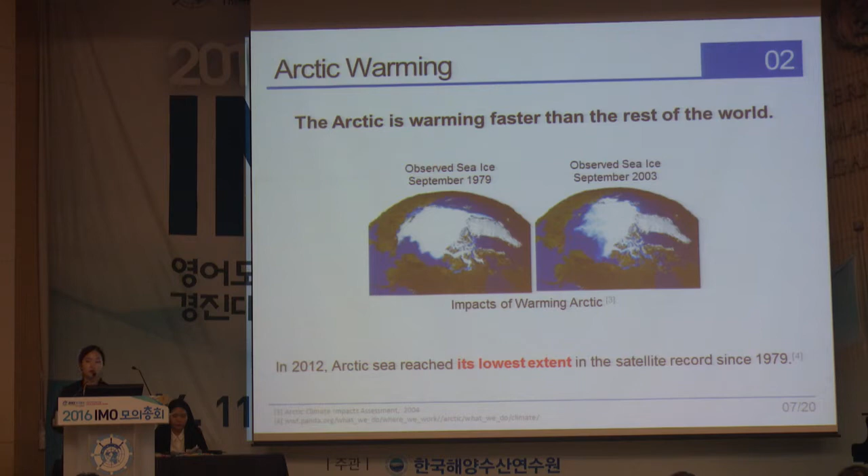Also, 80 years from now, the sea level is expected to rise more than 1 meter. And air temperature already increased about 5 degrees Celsius over the last 100 years. Moreover, the Arctic summer sea ice is expected to disappear completely in 2080. That's why we need to regulate the black carbon to stop the Arctic warming.

And where does black carbon come from in the Arctic? One of the primary sources of black carbon emissions is shipping. According to my research, they predicted the emission of black carbon from shipping potentially accounts for about 50% of the whole BC emissions in the Arctic. As you know, HFO is a main fuel of vessels. When HFO burns to activate the engine, it generates a lot of black carbon. Therefore, shipping vessels shall be under regulation by IMO.

However, despite the necessity to regulate emission of black carbon, in MARPOL, regulations are insufficient. And even in the Polar Code for vessels operating in polar waters, there is no regulation of black carbon. It is just encouraged not to use or carry HFO in the Arctic. For these reasons, the next presenter will consider how to reduce the emission of black carbon.

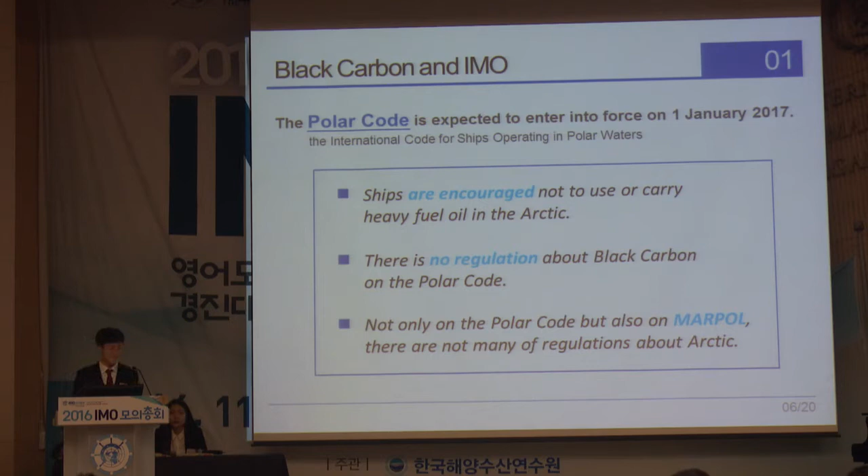Next subject we have to talk about is, obviously, fuel itself, which generates black carbon. Currently, most of the vessels operating in the oceans use HFO, heavy fuel oil. The reason why they use this is very simple. It's cheaper. But this HFO causes an extraordinarily large amount of black carbon emissions, and it is used almost exclusively in the shipping industry. Why is that? The reason is also very simple. Restrictions on HFO are not strict.

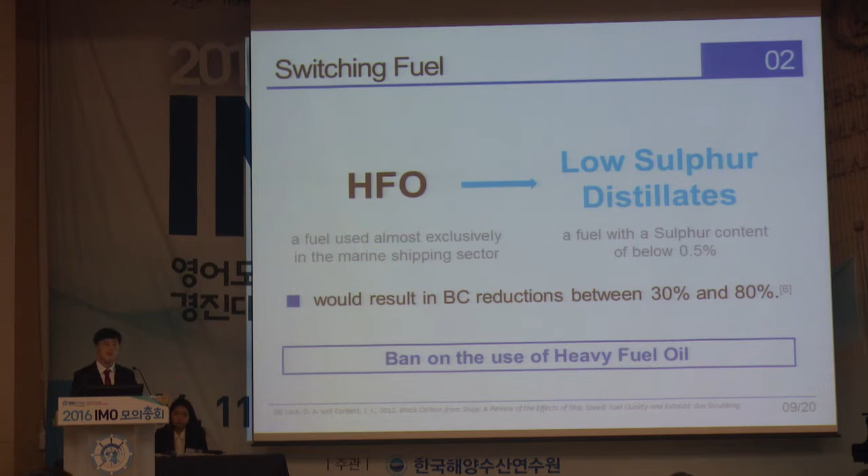Now, you might think that the use of HFO is the only cause of black carbon emission. It is not. There's also another factor called slow steaming. Slow steaming means intentionally reducing engine loads, which leads to a reduction from full speed to lower speed. Shipping companies around the world have pursued this method in order to make fuel savings so that they can save their money.

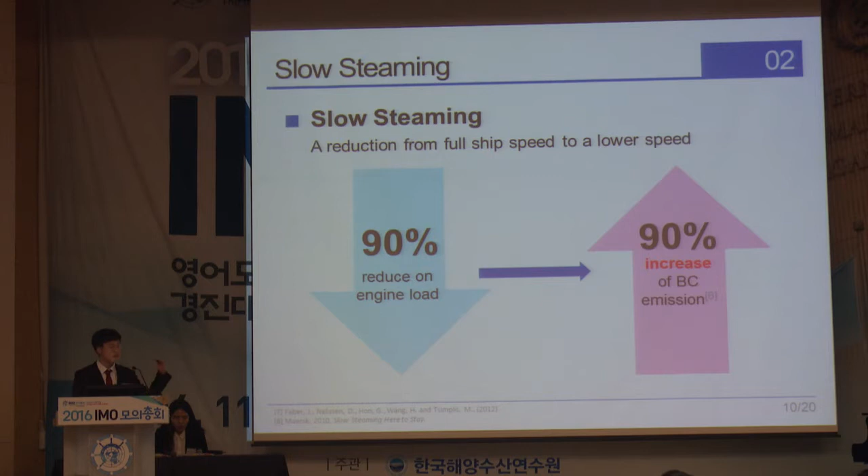According to multiple scientists in a report by Maersk, a 10% decrease in speed of a vessel leads to a 20% reduction of fuel consumption. On the other hand, if engine load is reduced 90%, it leads to a 90% increase in black carbon emissions. Let's look at a more simple graph about this phenomenon.

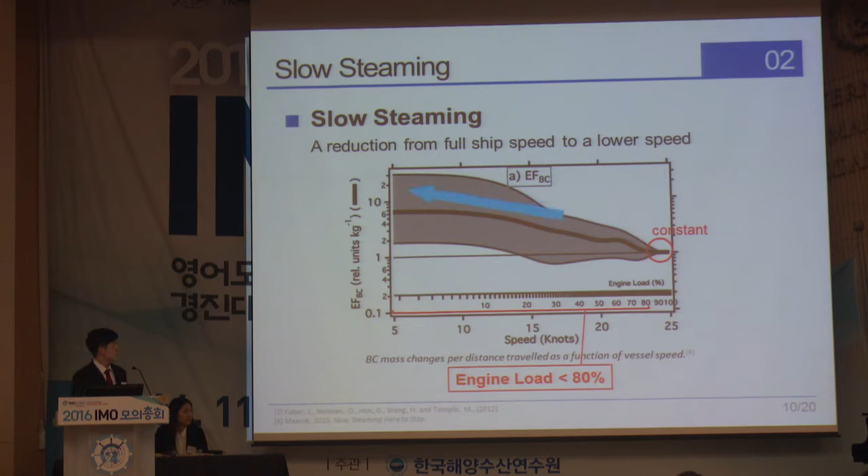When engine load remains almost constant, like from 80 to 100% of its full capacity, black carbon emissions stay almost constant. However, if engine load decreases below 80% of its full capacity, you can see there's a rapid increase in black carbon emissions.

In that sense, there should be proper adjustments on using slow steaming. And those are derating and retuning. Both are basically the same, so I'll just say derating. Derating means operating an engine at less than its rated maximum capability in order to prolong its life expectancy. This method provides ideal combustion at all loads so that it can counteract the significant increase in black carbon emissions caused by slow steaming.

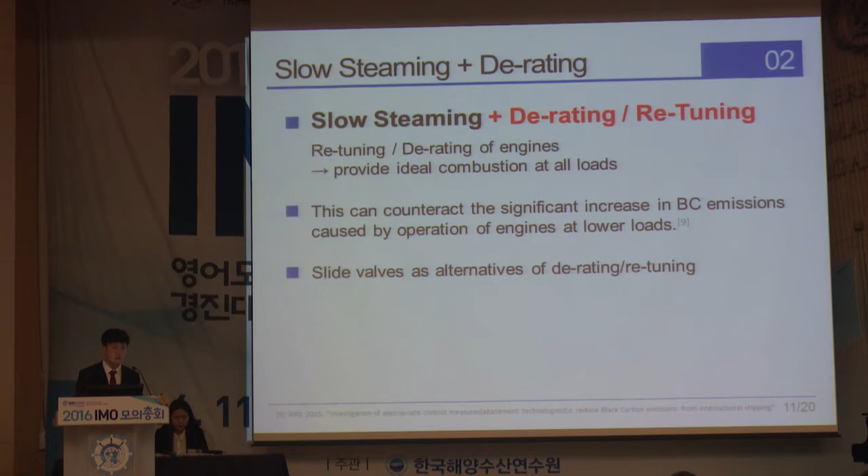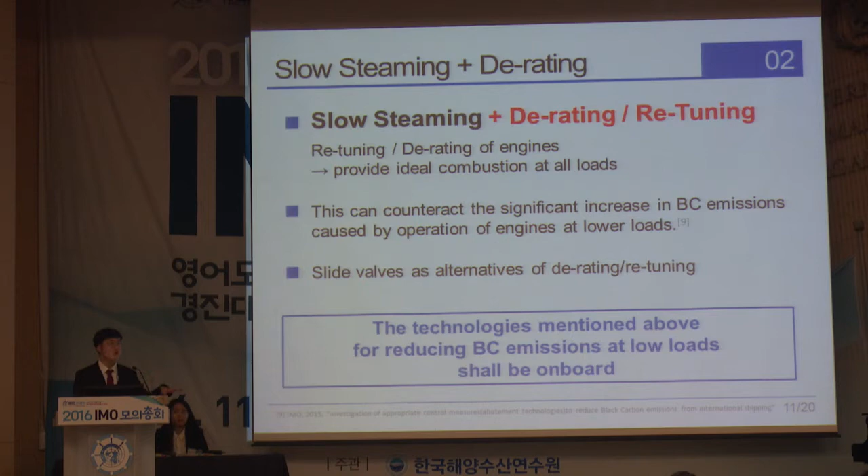In case of a vessel for which it is impossible to use derating, an alternative device called slide valves can be an option. Slide valves are easy to install and operate, and of course reduce a lot of black carbon emissions. Therefore, we suggest to the IMO that the technologies mentioned above for reducing black carbon emissions at low engine loads shall be on board.

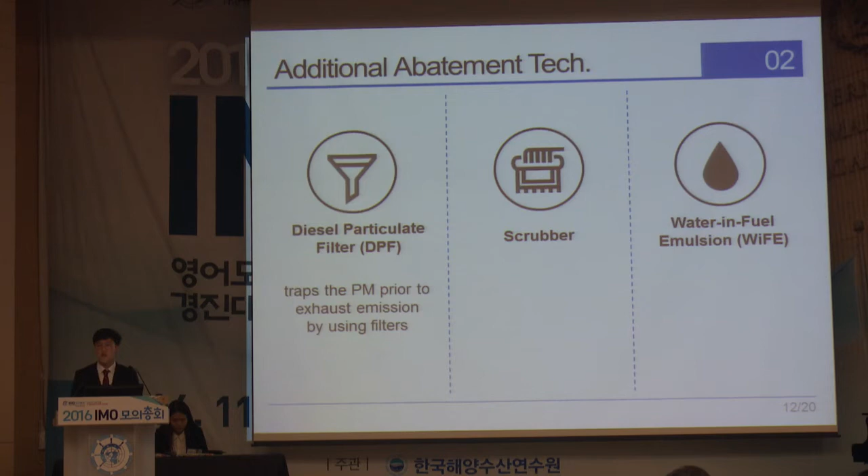However, switching fuel or using derating is not enough. Low sulfur distillates are definitely cleaner, but they are just fossil fuel and still make some black carbon emission. According to the IMO report on black carbon control measures, 3 possible black carbon abatement technologies are considered the most cost-effective and feasible. The first one is the diesel particulate filter, DPF. Although DPF is a rather new technology in the marine sector, it has been proven quite effective on reduction of particulate matter and black carbon as well.

Second is the scrubber. A scrubber is a device that uses seawater or fresh water to wipe out all the pollutants coming out from an engine. Third, water in fuel emulsion, WIFE. WIFE is a technology adding water continuously to the fuel supply process, which luckily leads to a reduction of black carbon emission.

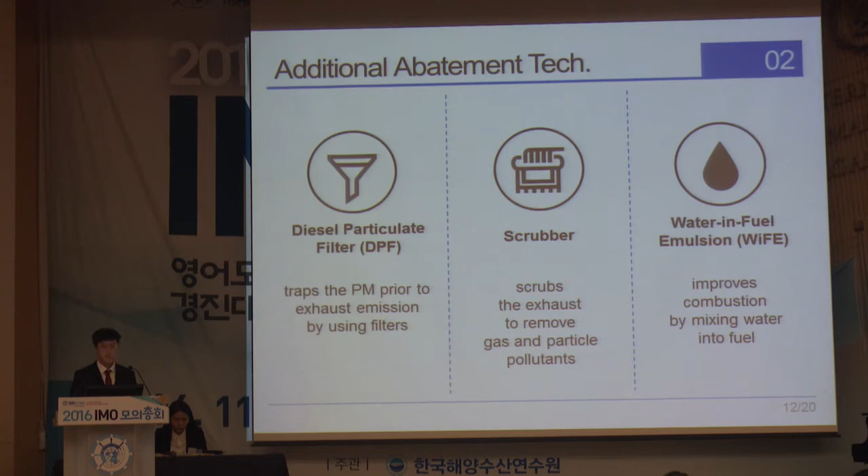The exact percentage of reduction of each technology is, for WIFE, 56%, for DPF, 20%, for scrubbers, 65%. Now that's a huge amount of reduction. The numbers I just gave you are calculated as the average of the lowest possible and the highest possible. Please keep that in mind. Anyways, except for switching to liquefied natural gas, LNG, no other options make better outcomes than these 3.

This indeed makes the choice depend on the operational pattern of the vessel, or its vessel type, or simply put, it is up to operators. Therefore, we suggest to the IMO that at least one of the technologies mentioned above should be highly recommended. That was it for me, and the next presenter will continue with summarizing our proposals and suggesting the final amendments. Thank you.

So now, we would like to make several proposals to IMO to save the Arctic environment. The very first one is a ban on the use of HFO. We all welcome the decision that IMO made at the MEPC 70 meeting to cut sulfur content by 2020. And this will reduce a huge amount of HFO used by Arctic shipping. However, this plan will not eliminate HFO completely. For this reason, we impose the ban on the use of HFO in the Arctic area.

Second, we suggest IMO set mandatory regulations on BC emissions. As there is no valid regulation on black carbon emissions, black carbon emissions are currently not regulated in the Arctic area. Third, we also suggest IMO recommend applying BC abatement technologies so that ships can reduce black carbon even more.

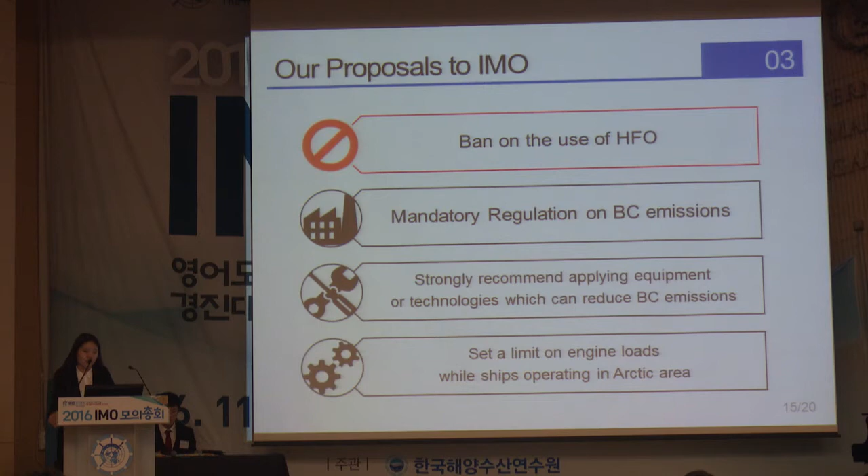Finally, we strongly request IMO set a limit on engine load. Of course, we fully understand that ships sometimes need to change their speed due to ice conditions in the Arctic area. However, if there's no limit on engine load, ships can decrease their speed to save their own fuel, and this will result in the increase of black carbon emissions. From now on, we are going to show you how we amended MARPOL in detail.

This is the amended MARPOL that we made. Under MARPOL Annex 1, in the Antarctic, the use and carriage of HFOs are strictly banned. Likewise, we added a new chapter saying that in the Arctic, the use of HFOs shall be banned. Also, in order to eliminate HFO completely from the Arctic, we call for a discussion about an Arctic HFO ban at MEPC 71, which takes place in 2017.

Next, we added some new regulations on MARPOL Annex 6 as well. First, we added an additional article about black carbon to draw attention. Second, as we thought it is almost impossible to make black carbon disappear immediately in the Arctic, we suggest IMO set a deadline and decide how much black carbon emissions shall be reduced. For example, black carbon emissions shall be reduced to 50% of current emissions by 2020. And if it is not fulfilled, a penalty may be given. Also, set a lower limit on engine load so that ships cannot operate at very low loads deliberately.